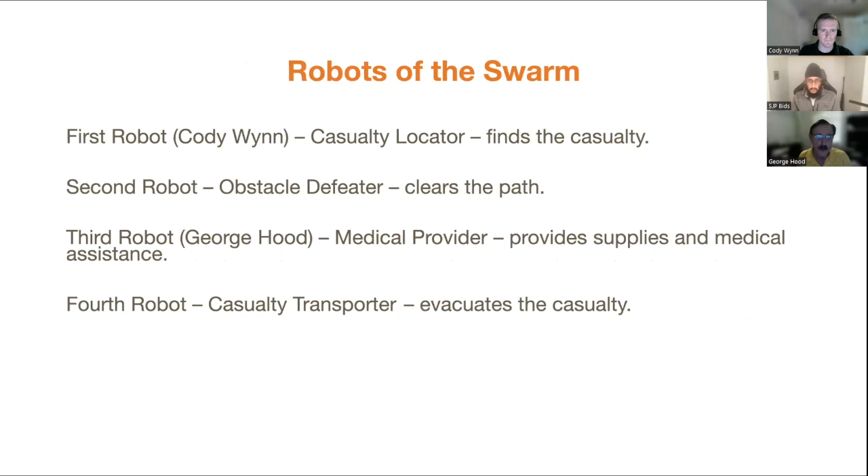Okay, thank you for that introduction, George. My name is Cody Wynn, and I will be demonstrating the first robot of our swarm system, the casualty locator robot. So the first thing I'm going to show is the mechanical design. As you see, the overall design of this robot is kind of a quadcopter design, fairly standard. The material is going to be made out of fiberglass in order to keep it strong but very light. And the different components of the device you can see highlighted in this image below. The overall size is going to be about 36 inches across by 12 inches tall.

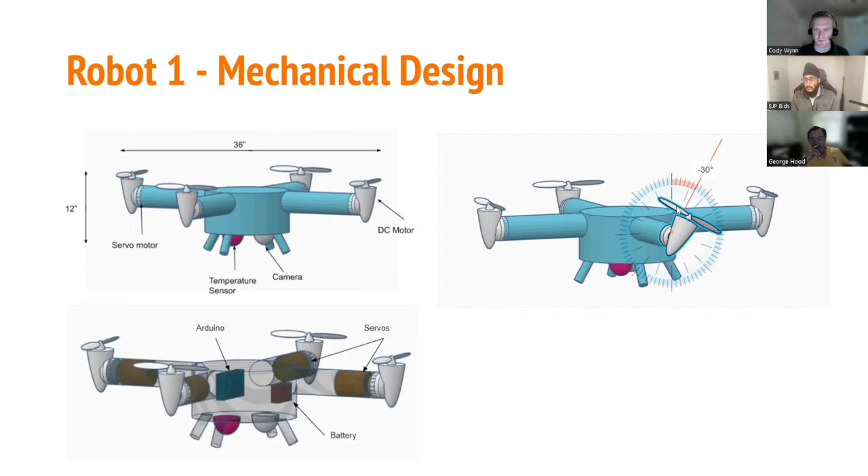There are going to be 4 DC motors that drive the 4 propellers to keep it aloft. And the pitch of those motors is going to be controlled by 4 servo motors inside of each of the arms. On the inside, there's also a battery to provide power, an Arduino board to give it the brains and the logic. And on the underside, there's a temperature sensor, aka a thermal sensor, and a light sensor, aka a camera, that it would be scanning for casualties and obstacles in the way of the search path. And you can see on the right here, just a quick demonstration of how the pitch will be controlled by the servo motors inside of the arms.

So here's a look at the circuit diagram showing you some of the internals for the electronics. We have on the lower right here 4 DC motors controlling the propellers. They are wired in parallel, so they all go at the same speed, but their speeds are controlled by the logic of the Arduino board, controlling the voltage to a transistor that controls the power from the battery. So that's what controls the RPMs of the propellers. Each of the pitches is controlled by an individual servo motor; 2 at a time will turn in order to make it turn left or right, or all 4 will lean forward in order to make the unit move forward.

The sensors you can see on the left side here. This upper left one is the camera sensor, which is used for detecting obstacles. And this temperature sensor here is used for detecting casualties. So it can see fairly well through any kind of foliage or rough terrain background.

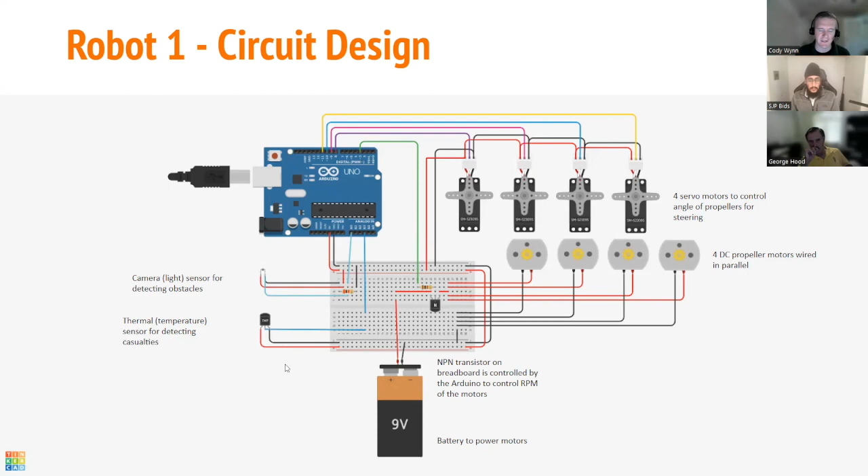The logic of the unit: essentially our system is controlled by a central hub unit. That central hub will receive and then transmit a command to this locator robot to take off and follow along a set search path set by the central hub. So when the robot receives the search path commands, it will take off and begin flying through the air along a designated flight path. While it is flying, it will be continuously searching for obstacles and casualties. If it finds an obstacle, it will transmit the location to the hub and then continue along its flight path. Its primary objective is to find a casualty.

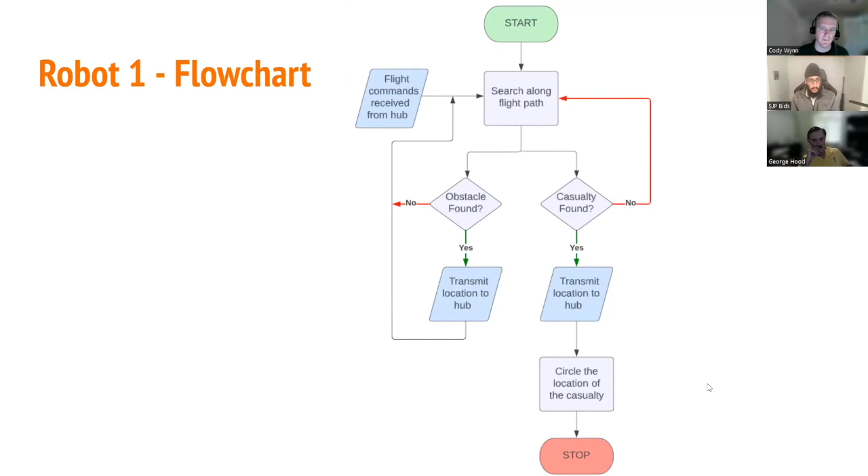If it finds a casualty, it will transmit the location of the casualty, and then it will circle around the casualty continuously until it receives further instruction from the central hub.

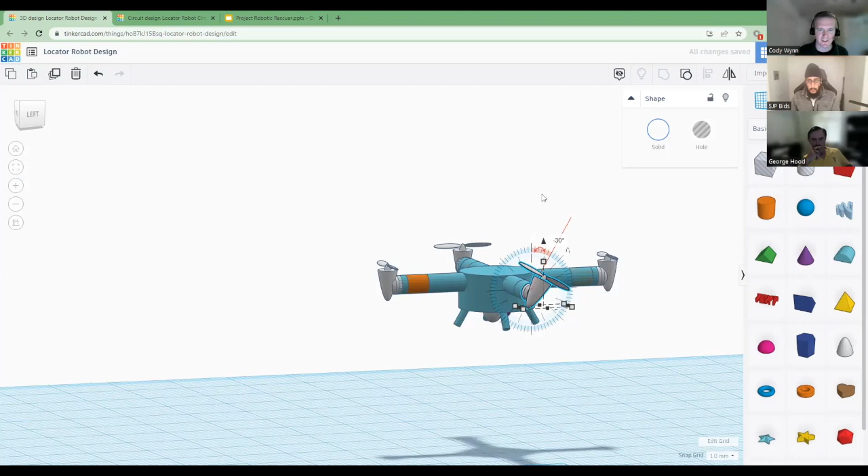So now I'm going to cut real quick to the 3D design of the robot. So you can see essentially what I showed in the earlier presentation slide, but what I wanted to demonstrate here was the angles. So when the propellers need to provide either forward movements or turning, they will move forward at a 30-degree angle. 2 of them will do it to make it turn one direction, and all 4 will move forward in order to make it lean forward at an angle like this.

If I make the unit transparent, you can see the internals, with the Arduino board, the battery, the 4 servos, and the DC motors are inside of these housings. And then if I jump over to my circuit design, this is the circuit as I showed. I will put it into a simulation mode. I won't go into the detail, though.

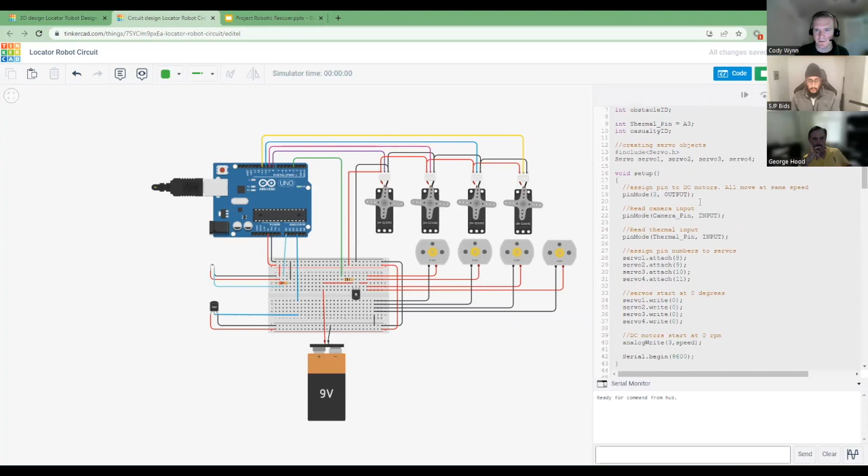Right now, the unit is under power. The servos are at a 0-degree angle, and the motors are at 0 RPMs. If the central hub gives it a command such as take off, see there will be a surge of speed in the motors. So they would jump up to about 3,800 RPM. And once it reaches a cruising altitude, it will settle down at about 2,400 RPM.

If the unit needs to move forward, it will receive a forward command. All 4 of the servo motors you can see pitch forward at 30 degrees for a few seconds to give it some forward momentum, and they return to 0, and it will continue that process as necessary. If it needs to move higher, the RPMs of the DC motors will surge for a while before returning back to cruising speed. And if it needs to move lower, they will slow down a little bit.

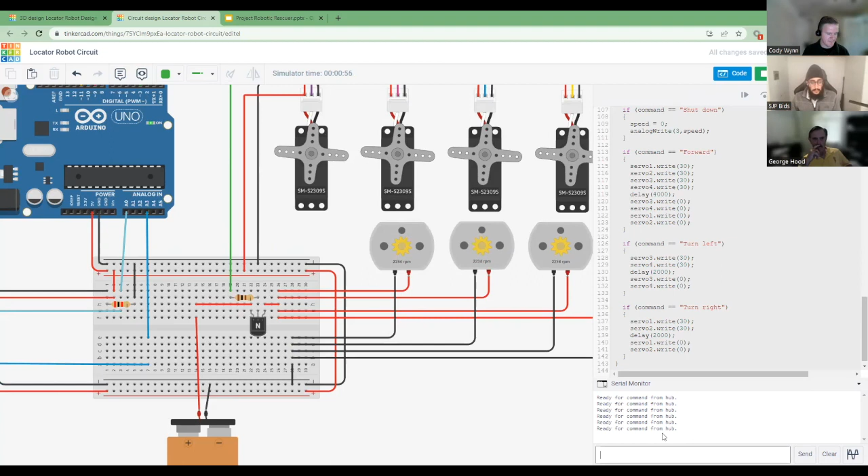Similarly, I can turn left. 2 of the servo motors will function and return, and turn right to go in the opposite direction.

Now, over on the left side, I'll demonstrate the function of the sensors. So the camera sensor here is pre-programmed with an algorithm in the Arduino board to search for different types of obstacles. But once it finds something and receives a certain input from the terrain, you can see in the serial window monitor down here, it'll identify an obstacle was found, share the obstacle with the hub, the location of it, and then it resumes its search path.

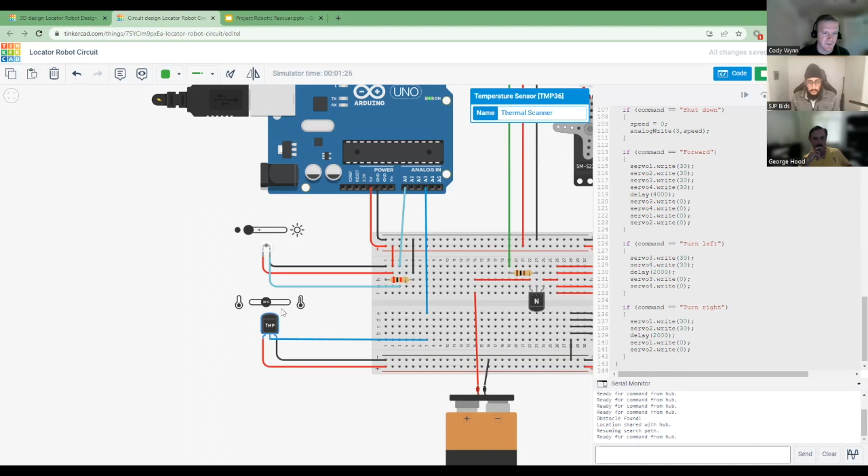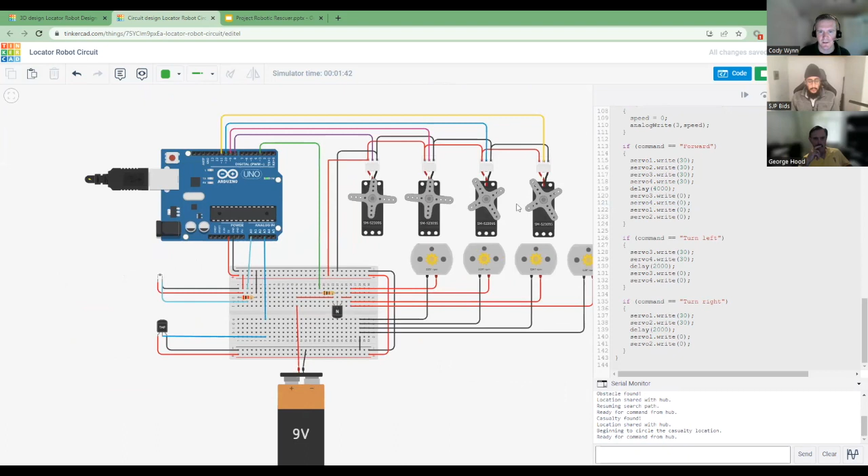Similarly, the temperature sensor normally reads about an ambient temperature as it's scanning. When it identifies a temperature scan that is close to human body temperature, it will identify that a casualty was found, share the location with the hub, and begin circling the casualty location. And you can see over here, 2 of the servo motors are pitched forward to provide it that circular path.

So you can see the rest of the code that will be provided in the slides after the presentation. But for now, I will pass along the presentation to Monik, who will do the presentation of the obstacle defeater robot that will respond to the obstacles found by the search robot.

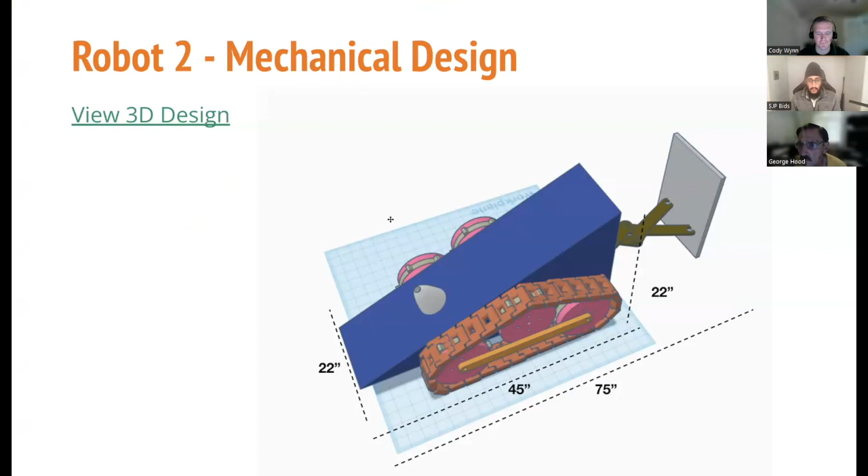The swarm's second robot, the obstacle defeater, will be responsible for removing obstacles when encountered by the Pathfinder. The robot will be about 22 inches in both height and width, and 75 inches in total expanded length. The design will consist of primarily 2 object moving mechanisms. On the flat backside will be a barrier pushing plate that is extended from the robot using a push arm. The pushing mechanism will consist of a motor and a gearbox that will increase the torque, and a force sensor that will determine if the obstacle is stuck on the pushing plate.

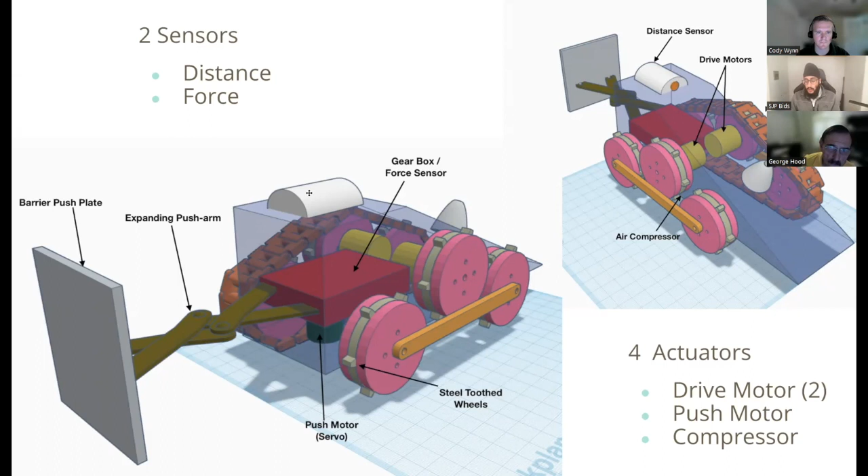On the slanted front surface will be an inflatable high pressure balloon that is ejected from the cone-shaped nozzle. The robot will be driven by 2 motors on continuous steel tracks, which will increase stability and maneuverability for rugged terrain. And the robot will consist of, in total, 2 sensors, a distance and a force sensor, and 4 actuators, which include 2 drive motors, a compressor for the balloon, and a push motor for the push plate.

The following is the circuit design, which models the 2 sensors and the 4 actuators. The 2 sensors included are the distance and the force sensors, and the 4 actuators are the 2 drive motors, and the push plate is represented using the servo, while the air compressor is represented using the light bulb.

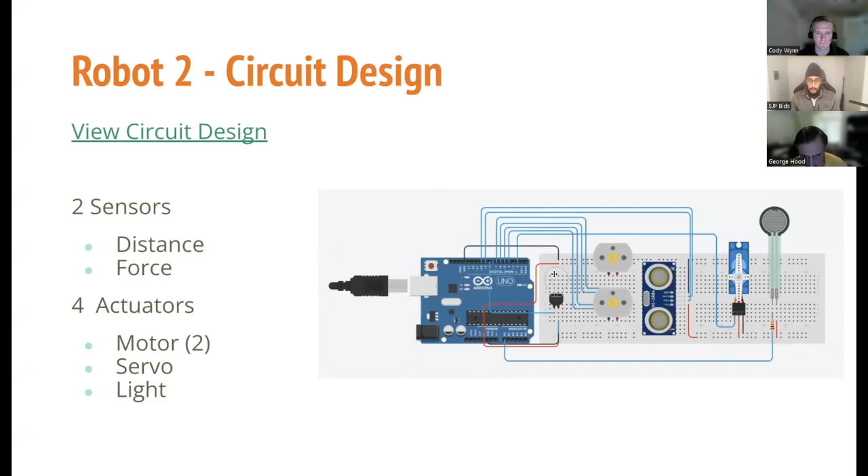The robot will receive GPS coordinates to the obstacle from the central hub, and will begin moving towards the coordinates along the swarm path until it hits the obstacle with the force sensor. When the force sensor detects an obstacle, in which the force sensor will be high, it will begin to extend the barrier push plate as it pushes the obstacle.

If the push plate is successfully expanded all the way, that means that the obstacle has been moved, and the robot will send a message to the central hub, letting it know that the obstacle was moved. If the push plate was not successfully moved, the robot will turn 180 degrees, allowing the other mechanism to be used.

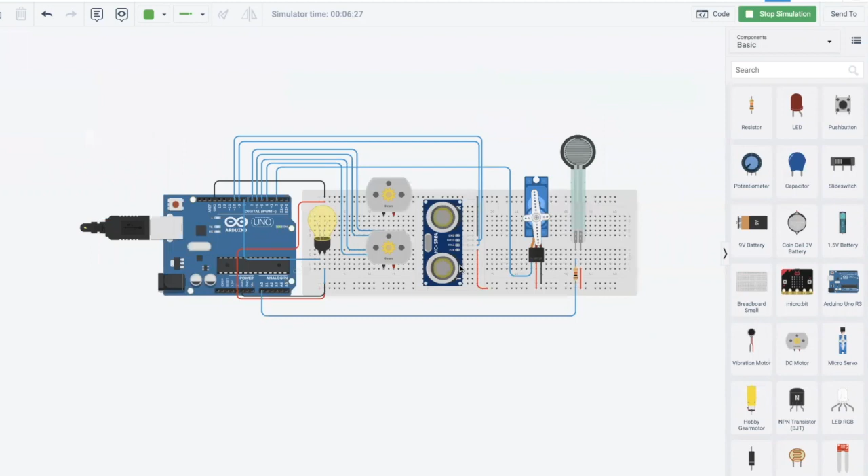It will inflate the balloon dozer, and it will then use the distance sensor to determine if the obstacle was successfully moved. So this is the working model of the robot circuit. The first thing that the robot does is await the coordinates from the central hub to the obstacle. It then uses those coordinates to traverse the path and make turns as necessary. This is simulated in this model by sending an input from the serial monitor.

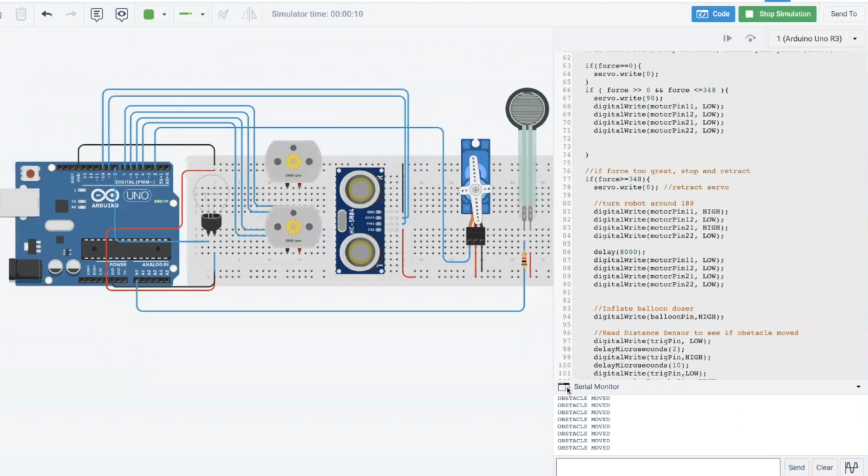So if the robot needs to move forward in order to get to the coordinates, both of these motors will move in the same direction in order to move the robot forward. So in this case, the central hub has sent the command, and now both motors are moving in the same direction and the robot is moving forward. In order to turn the robot, one of the motors will need to move in the reverse direction.

Now the robot is going to stay in motion and keep traveling along the path until it comes across an obstacle. The obstacle is sensed by this force sensor. Currently, the force sensor reads 0, so the robot drive motors will keep spinning until the sensor detects a force. When an obstacle is detected, the push plate is going to push the obstacle, which is indicated by this servo. So now that the obstacle is detected by the force sensor, the servo has now turned 90 degrees, indicating that the push plate has expanded.

As the push plate pushes against the obstacle, there will be an increasing force acting on it. So this force sensor, as this push plate opens, will continue to go up. If the push plate is able to fully expand, that means that the obstacle is successfully moved, and the robot informs the central hub. But if the force sensor on the push plate exceeds the maximum limit, which in this model is 5 newtons, the push plate will collapse. So when this force sensor increases above 5, the push plate collapses, and the servo returns back to its low state. This returns the force sensor value back to 0.

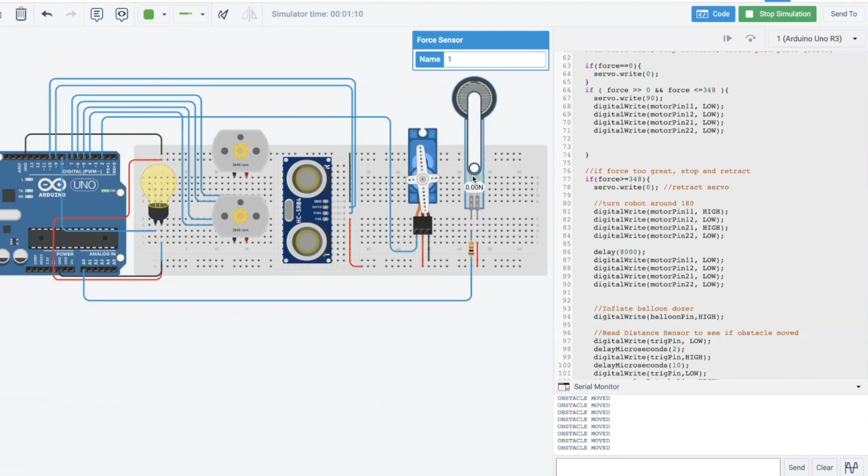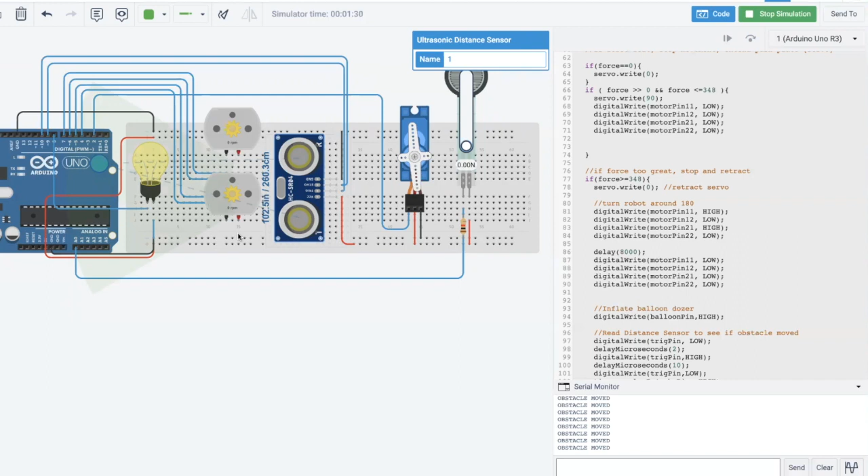The robot turns 180 degrees, which you can see by the motors in motion. After it has turned 180 degrees, the motors will stop rotating, which now they are at 0 RPM. And the air compressor will turn on in order to inflate the balloon, which is indicated by this glowing light. So now that the light is on, that means that the balloon has been inflated and is pushing against the obstacle. Finally, the proximity sensor will be used to determine whether the inflation balloon was able to successfully move the obstacle out of the way.

If the proximity sensor determines that the obstacle has moved greater than 75 inches, that means that the obstacle has been successfully moved, and it will send a command to the central hub. So in this case, the proximity sensor reads that the obstacle is at 102.5 inches, and so it sends the command that the obstacle has moved.

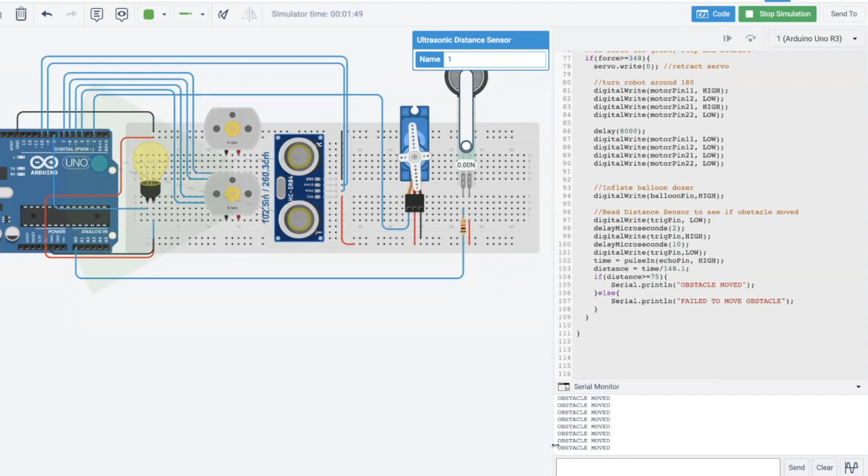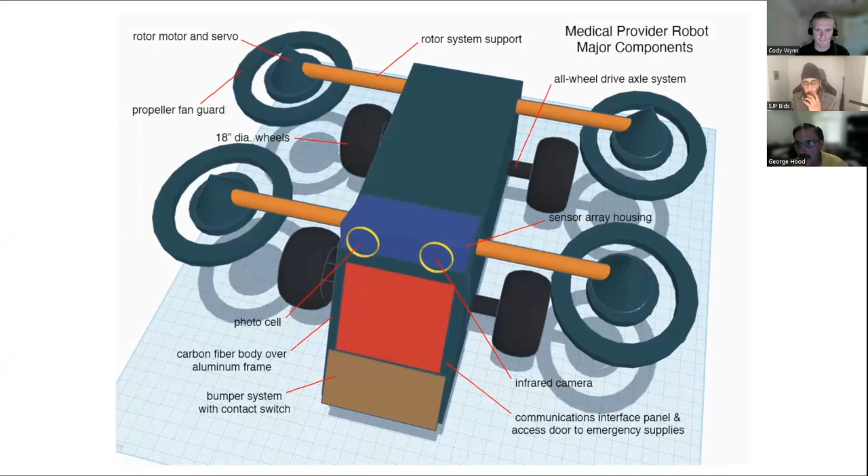Hello, my name is George Hood. Welcome to the briefing on Robot 3, the medical provider robot. This robot has evolved substantially throughout development, and it is much larger and more robust than it was at the first design shown here. This is the final design. The colors shown are not the ones that will be used in the production robot. Use of colors here is simply for illustrative purposes.

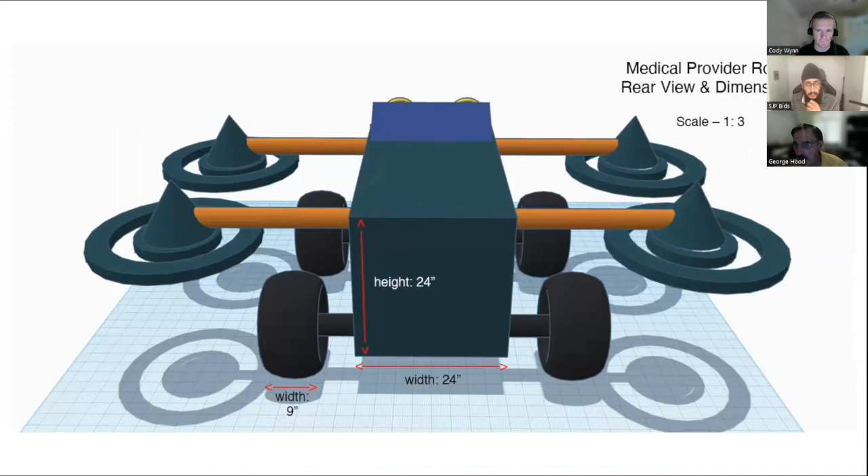The most significant changes are size. This unit is about 3 times larger than the original design. On-ground mobility: this unit sports a completely redesigned drive system, incorporating large all-terrain tires, independently steered axles, independently suspended wheels, and 8 inches of ground clearance. Airborne propulsion: this unit has larger propeller systems, better positioned for more lift.

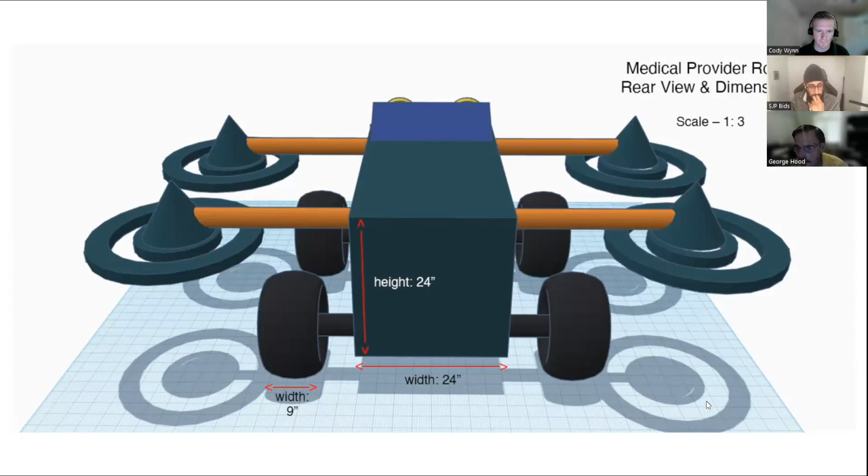Here's a rear view showing some of the dimensions. The width of this unit is the same as the width of the original design. It is about 6 inches higher than the original. The real change is in the length. These are the changes from the original design. This final design is almost 3 times as long as the original unit, allowing it to carry larger and bigger loads of not only emergency supplies like water, food, and medicine, but also larger items such as weapons and munitions.

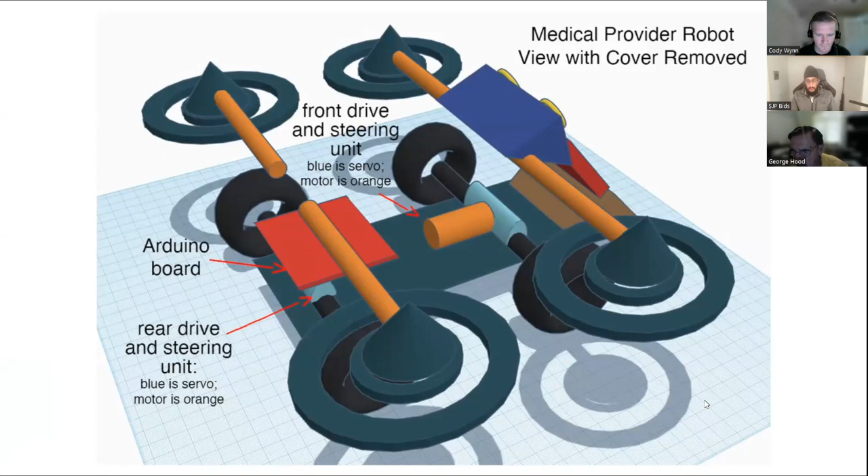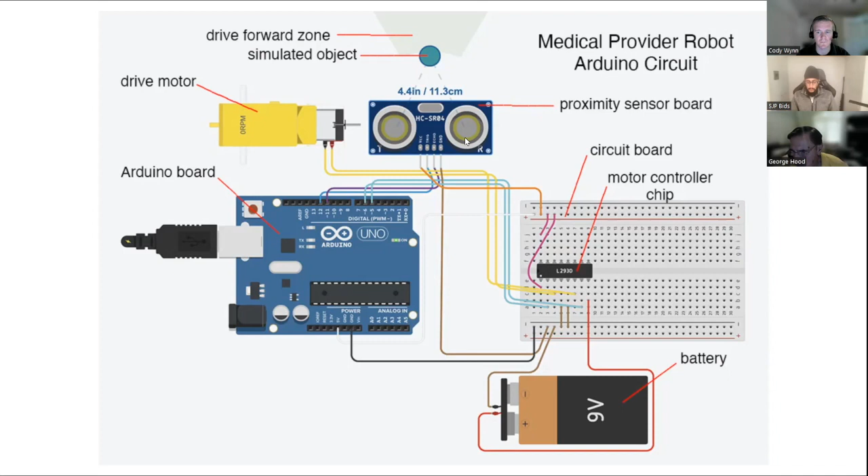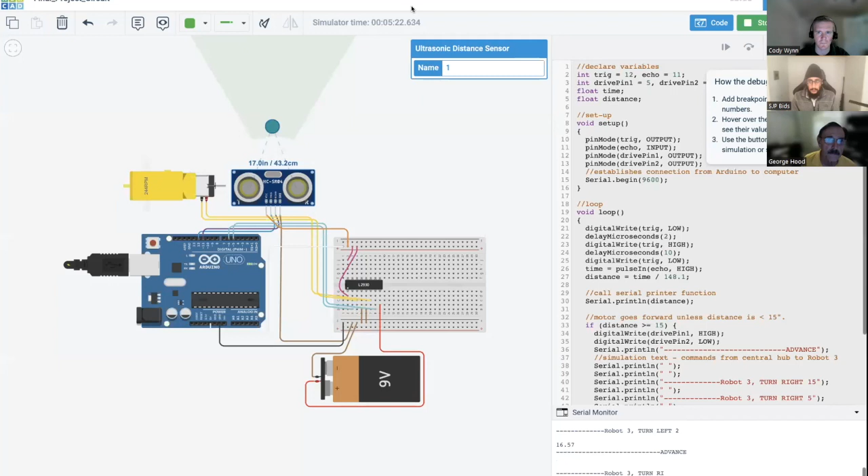This is the code that makes it happen. I would just point out that we have commands received here from the central hub, and we have a simulation of this robot. Stand by. Here is the proximity sensor, and you can see the serial monitor operating down here. As soon as it goes underneath the green zone, which is 15 inches, we are then at a stop condition. When we exceed 15 inches, the motors begin to advance and steering commands are received, and it continues to execute those commands.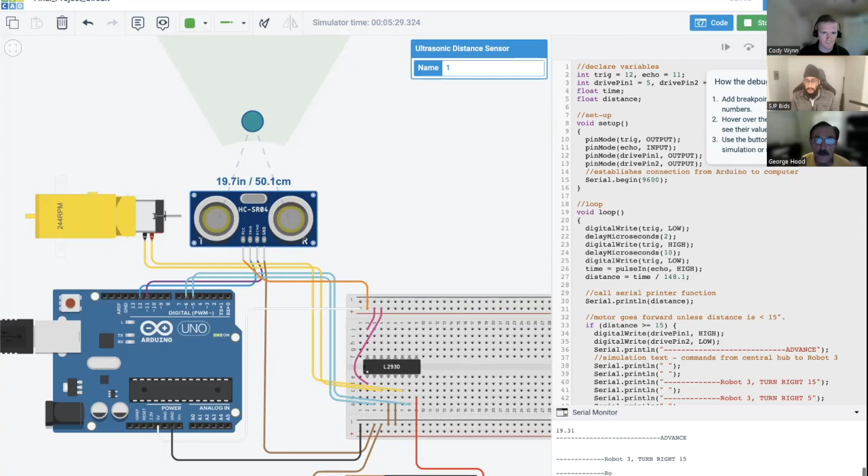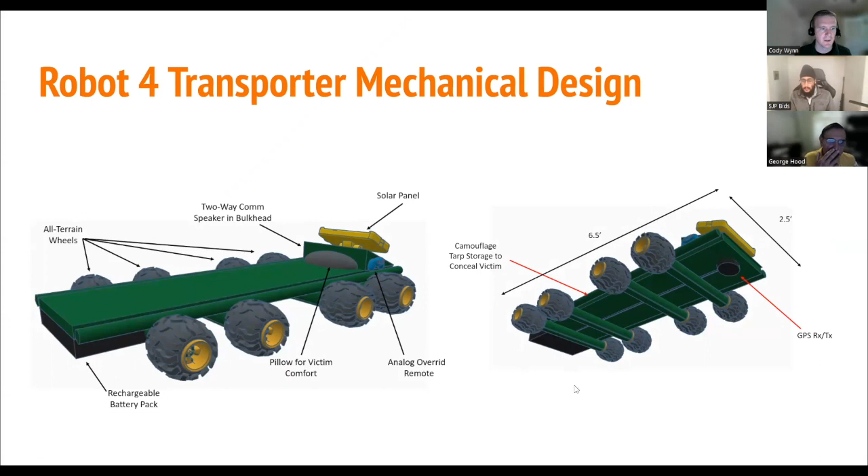One thing we do want to include, as outlined in the previous slides, there are 4 robots in this system that we have designed. The 4th robot is the casualty transporter robot. Now, we don't have Joshua Myers here, unfortunately, to help us present this, but I did want to give a brief overview of what the design was intended to look like. Essentially, it's a moving bed to help transport the casualty along the path that is provided by the central hub and cleared by the obstacle robot.

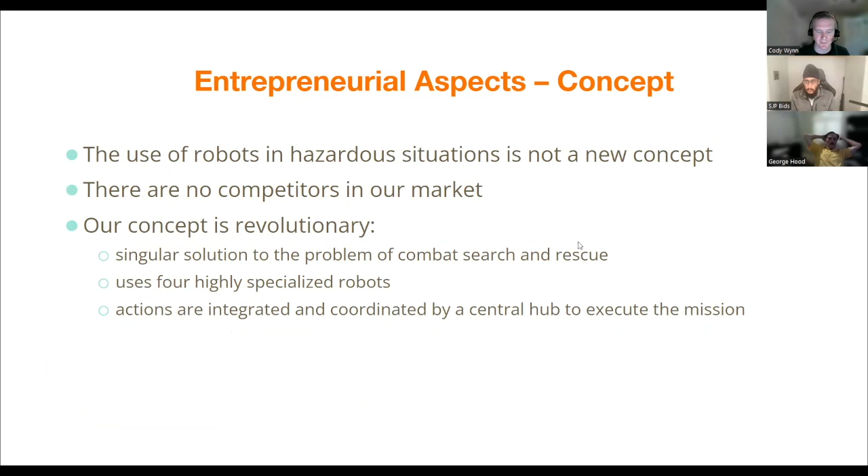Robots are ideal for hazardous situations such as modern battlefields or any other search and rescue operation. And this is a great opportunity for any investor because a system such as this can help save the lives of casualties without risking the lives of rescue personnel. And the swarm structure is much more capable and adaptable than any other system that's currently on the market.

And finally, to summarize, the central purpose of this system is search and rescue. 4 robots have been designed to achieve that goal: the casualty locator, obstacle defeater, medical provider, and casualty transporter. This is an autonomous, safe system that can reach remote, hard to reach, dangerous areas such as battlefields. It could potentially be adapted to other types of search and rescue, such as injured hikers or disaster response.

So finally, we just want to say thank you for your time. We hope that we were able to demonstrate the value of this system and that we were able to convince you to invest in such a system. Thank you very much.